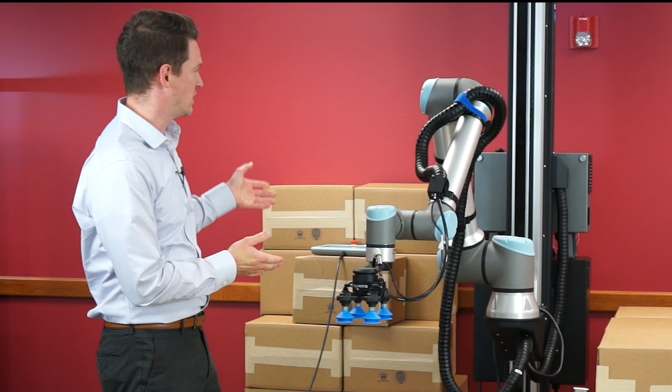Nathan DeRochers here. I'm an automation engineer from Axis New England, here today to talk to you about the Robotiq Palletizing system. Palletizing is a repetitive task that you might be familiar with from your factory, but doing it manually comes with a number of drawbacks.

First of all, as a very repetitive task, you're picking and placing heavy boxes all day, which can be very strenuous on your workers. Second of all, as long as you're running production, you need to have someone there at the end of your line palletizing, so it can be very time consuming. And thirdly, it's taking your operators away from other tasks that they might be better at.

Typically, we might solve this with an industrial palletizer, but this comes with a number of drawbacks. First of all, these are large systems that take up a lot of space. They're typically fairly expensive, and they're not flexible or easy to redeploy. So when your box sizes change, your pallet layout changes, it's not always that straightforward to reprogram it.

This is where the Robotiq Palletizing Solution is a great choice. It's a turnkey palletizing system that comes with everything you need to get started with palletizing in your factory. Robot arm, end of arm tooling, a linear actuator, pallet sensors, and an intuitive, easy-to-use software that allows you to program your pallet routine in just 3 easy steps, which we'll go through right now.

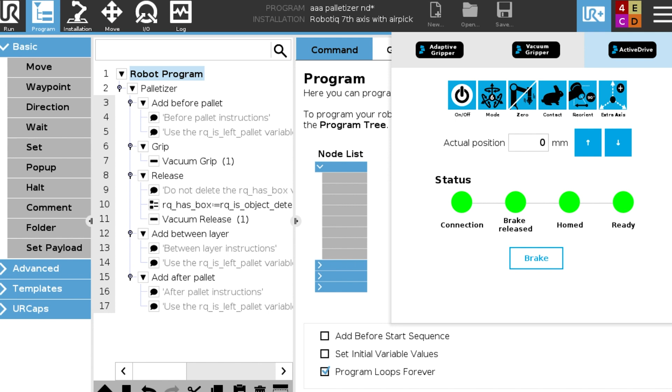All right, so the first step to teach your palletizing program is to initialize the vertical axis of the palletizer. So press on the URCaps button in the top right and make sure that you hit that start button. Next, we're going to insert a palletizing command from the URCaps tab on the left-hand side of your screen. This is going to guide you through the 3 steps required to set up the palletizer: the box, the pallet, and the pallet pattern.

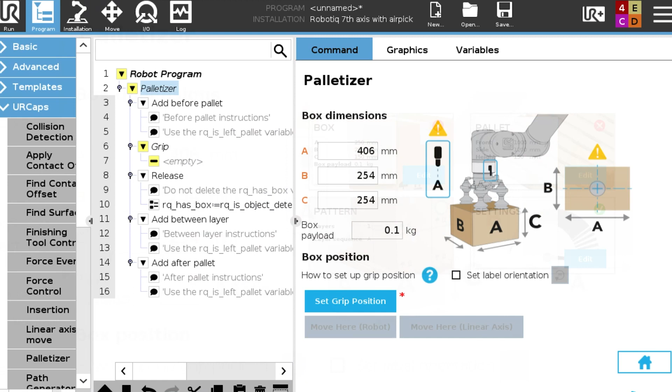First thing you're going to do with the box is program the box dimensions: length, width, and height. Right now they're in millimeters, but we can change this to inches. You're going to set the box payload, and then you're going to set the grip position. The only position we need to teach in this entire program is the position where the robot's going to pick up the part. So we're going to move the robot into position. We're going to hit the green check mark button to save it.

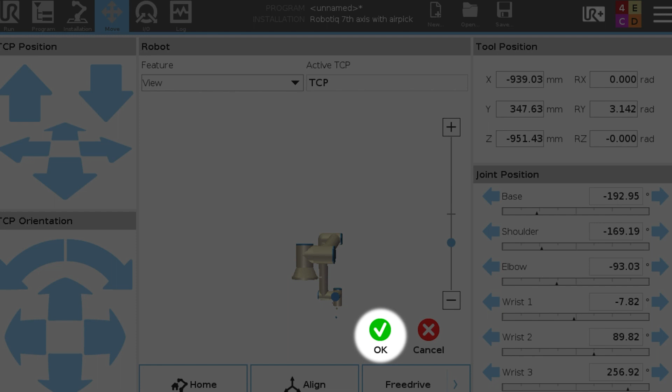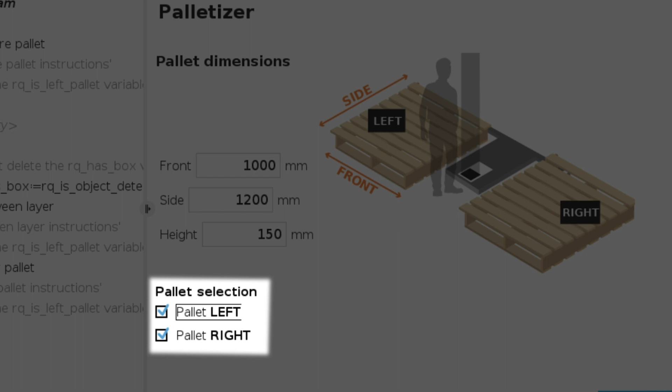Now we're going to teach the pallet layout. So we teach the pallet dimensions: front, side, and height of the pallet, and you select if you have a pallet on the left and a pallet on the right of the palletizer. After we've done that, we're going to insert a vacuum grip command to turn the gripper on to pick the box up. We're also going to insert a vacuum release command in the release section of the palletizing program so that it drops the box when it's in the right position.

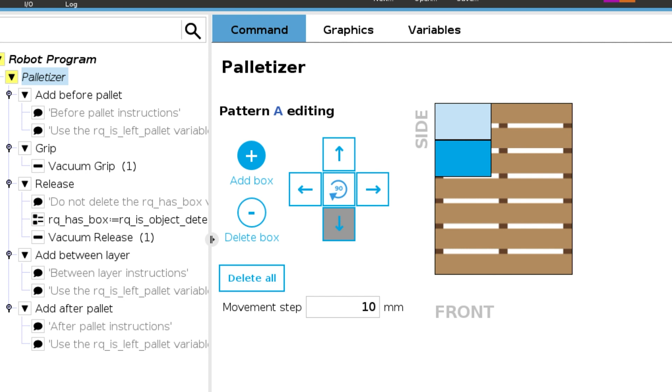Now we're going to click on the pallet pattern, and we're going to teach the orientation of each box with respect to the pallet. So you press the plus button, and it's going to add a representation of the box to this visual on the right, and you can lay them out wherever you want so it matches your exact pallet locations. When you're done with this, you hit that home button, and then you can go and choose the layer sequence. We have 2 layer options, layer A and layer B, and you can alternate between them as you see fit. You can add as many layers as you want.

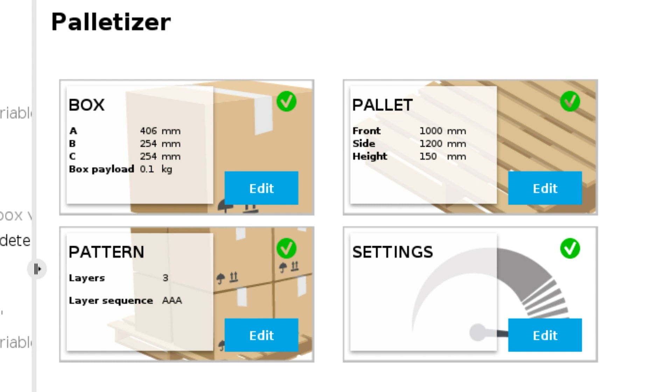Once all 3 of these have green check marks indicating that they've been completed, your palletizing program is complete and you can run the program. So as you can see, it really is that easy to get started palletizing in just those 3 easy steps.

One thing I wanted to add: you can support up to 2 separate conveyors with the Robotiq palletizing system, palletizing to each of these 2 different pallets. We also have stack lights on top to indicate to your operators, hey, it's time for a fork truck to come here and move this completed pallet out, and then we'll be on our way.